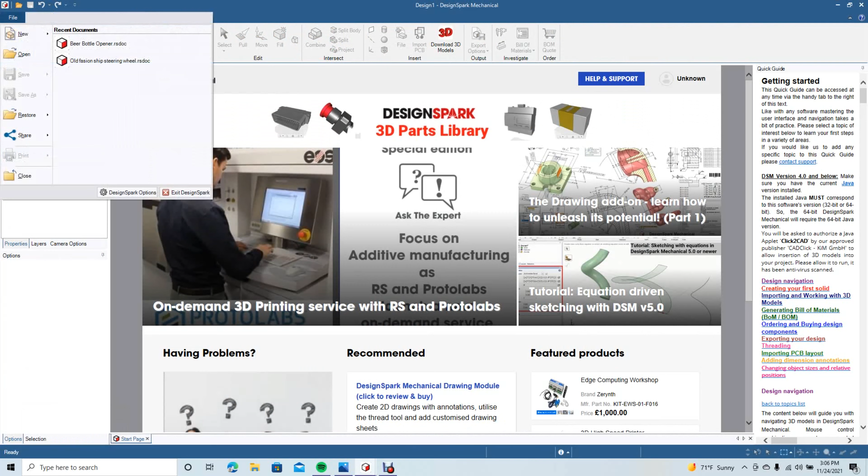So we're going to go ahead and go File, New Design, change the view to Plan, we'll minimize. I'm going to grab this JPEG that I got off the internet, use this as a reference, and we'll put it there in the center. Then we'll go ahead and blow it up. Then we want to get our square tool.

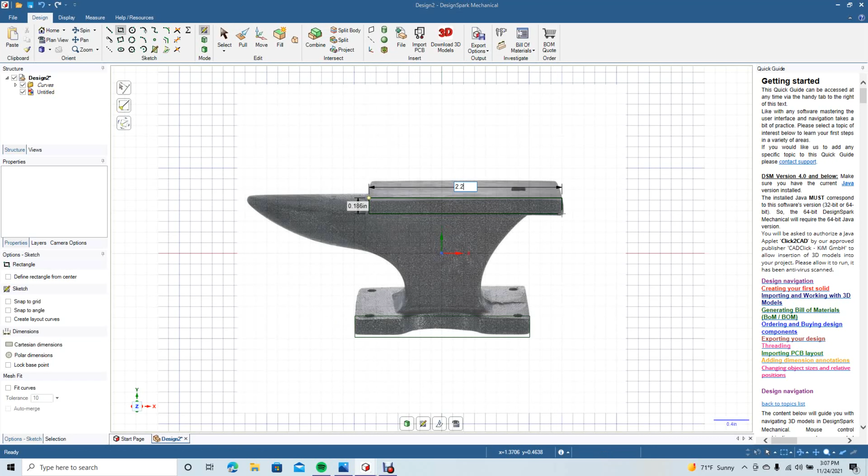So first we're going to draw this shape here. So that's going to be 2 by 0.25, and these dimensions aren't anything specific, they're just as close as they can get. So then this one here is going to be 2.2 by, hit the tab key, by 0.25. Okay, so go ahead and get rid of that.

So now we're going to go ahead and draw the shape in here. So we'll go ahead and use the line tool, go from there straight down and end it wherever. It's not going to matter too much because we're going to be using the spline tool to fill in the rest. So go ahead and get the spline tool.

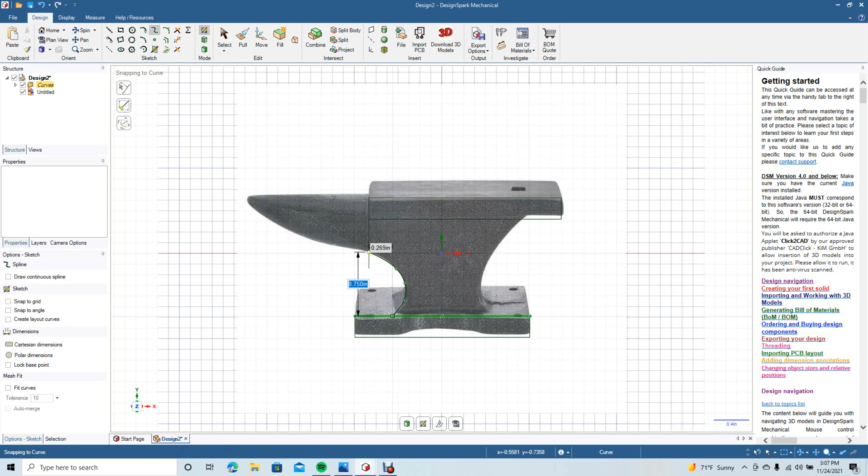We're going to go from there, drag out, curve, drag out, curve, drag out, curve, and then go ahead and select to end it. Go back to the spline tool, go from here, click, drag out, curve, drag out, curve, drag out, curve, and end it. We'll go here to select tool.

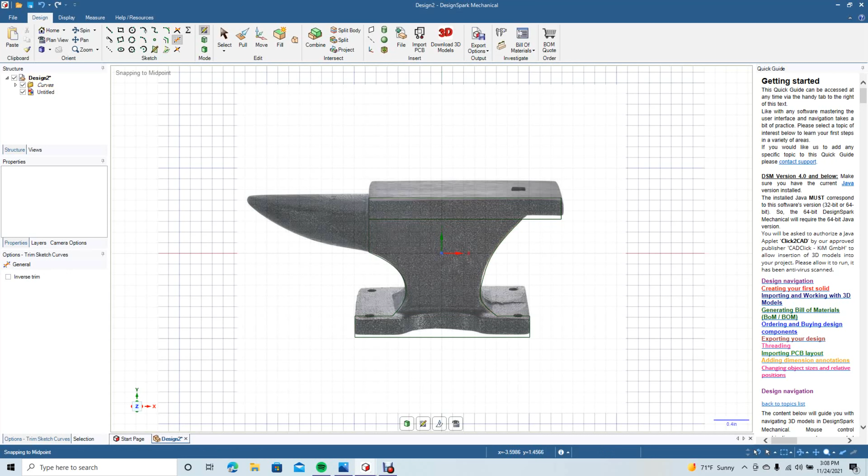Now we're going to go trim away these little pieces here, we don't need them. Alright, that's going to be it for that. Hit the select button, we'll go ahead and spin. Alright, we're going to go ahead and do the pull.

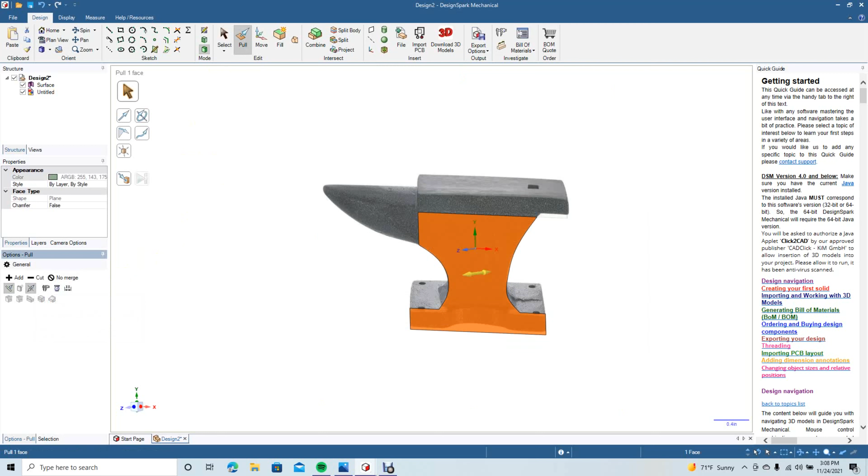Select the bottom part, go ahead and pull. We're going to pull from both sides, and we're just going to pull out with this, and we're going to go to one inch. Okay, we'll end that, and we're going to grab this.

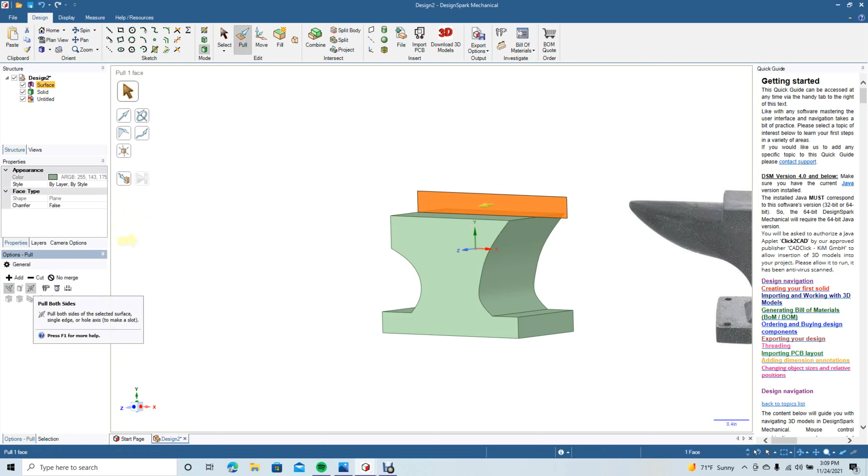Let's move that out of the way for a second. Going to get this one. We're going to go to pull. We're going to change this to both sides. This one we're going to make a little bit bigger because it's going to be like an overlapping shelf. So we'll go 1.4. Select.

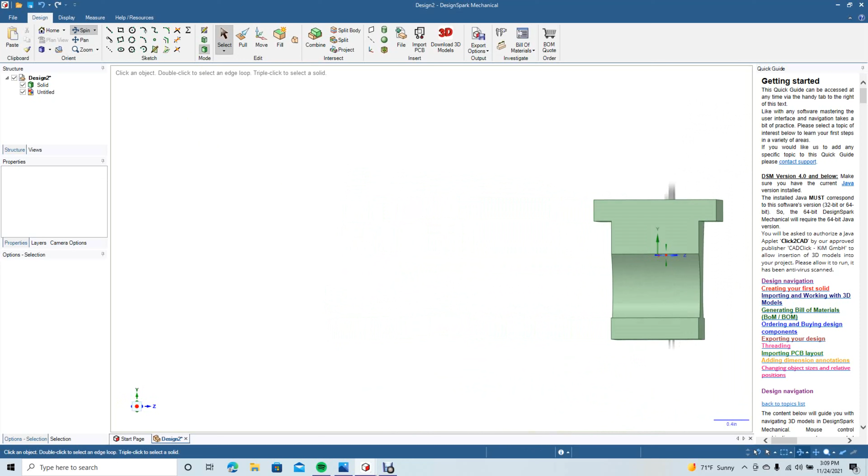We'll go ahead and spin that, see how it looks. Okay, it's a little overlapping. That's fine. Okay, now we're going to go ahead and spin this around to this side, and then we're going to go ahead and create our shape to use the loft with. So go ahead and click on that.

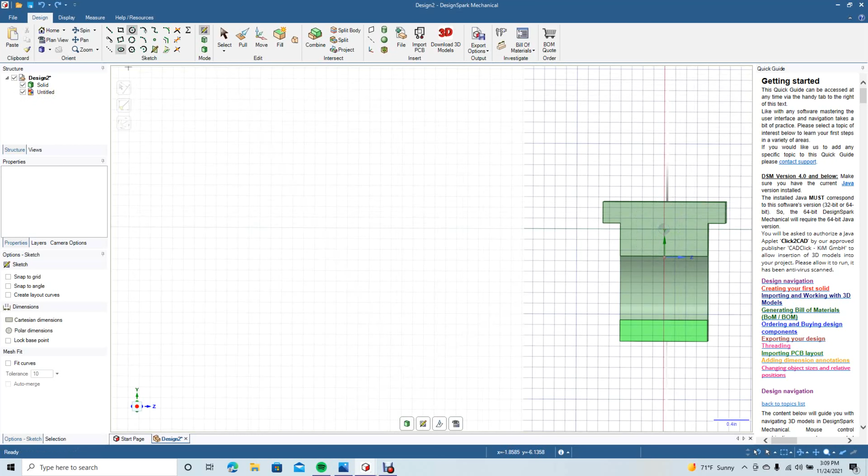Go ahead and get the circle. Go ahead and click in the middle there. Actually, I'm going to undo that. I need more of an oval, so we're going to use the oval tool, the ellipse tool. Click in the center. Pull out this way, almost the full length of the anvil. Click, drag up to the top,

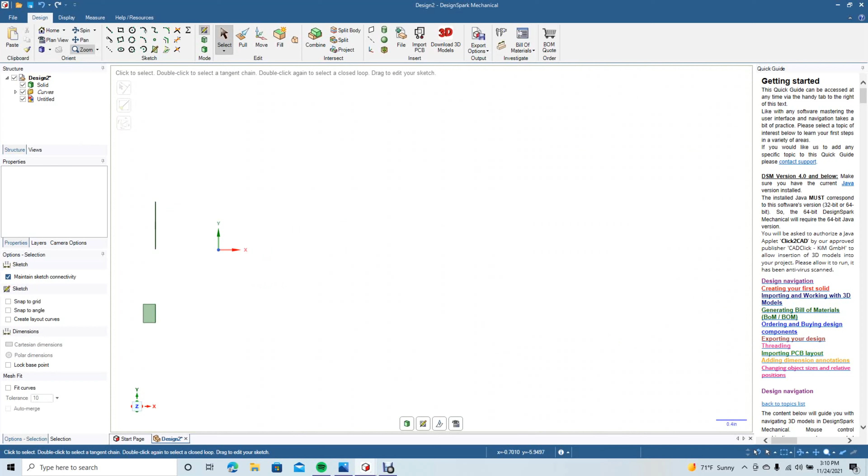click, select, go back to your view, go to top view, go back to mode, 3D mode, and we're going to spin this a little bit, and then we're going to pan over, use the pan tool. Okay, now we're going to copy this shape here. So click on it. Once it turns orange, Control C on the keyboard, Control V on the keyboard.

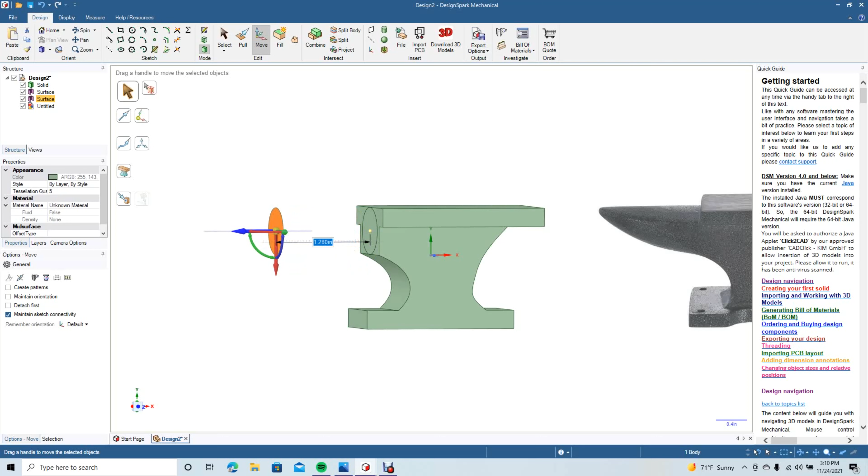Go ahead and go to your move. Click the blue arrow. Pull this out as far as you want your horn to be. So we'll go 1.28. All right, so then we're going to click here on the select tool. We're going to spin. Now we need to make this a little bit smaller, so we're going to make another one. Going to go grab your circle tool.

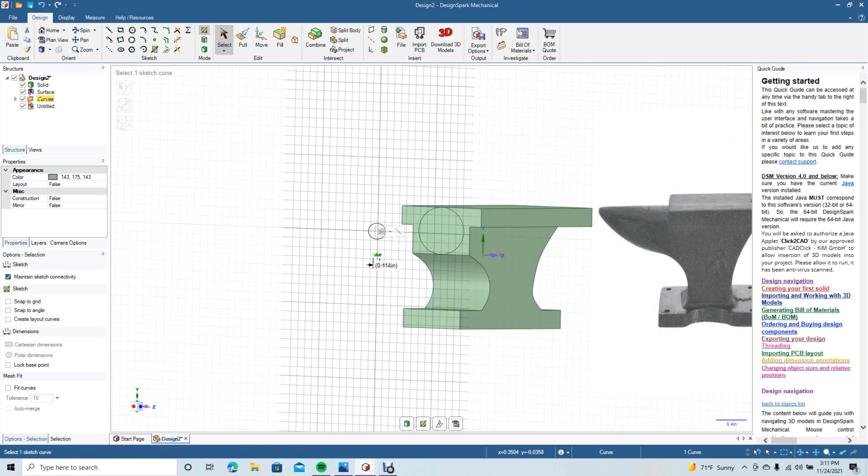Actually, let's do the same thing and go with an oval. So we're going to go from the center there, out and then kind of come down a little bit so it's like an oval, and then click. Hit the select button. We're going to get rid of that circle. We don't need it anymore. Hit delete. Get rid of that line. We don't need that. Okay, now we're going to go ahead and spin.

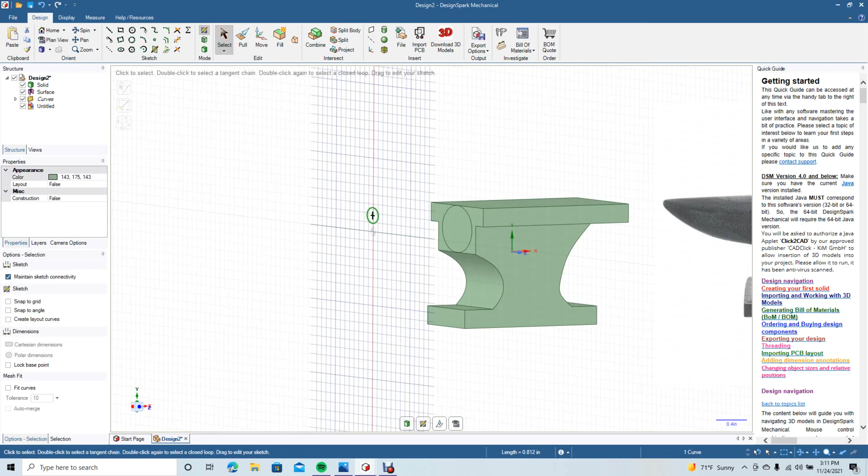So now we're going to go ahead and move this up because it's not going to be a perpendicular horn if we leave it there. So we're going to go ahead and go move. We're going to drag a marquee around that. We're going to use the red arrow and we're going to move it up. Then we're going to go with our select button, hit the spin tool, spin that around.

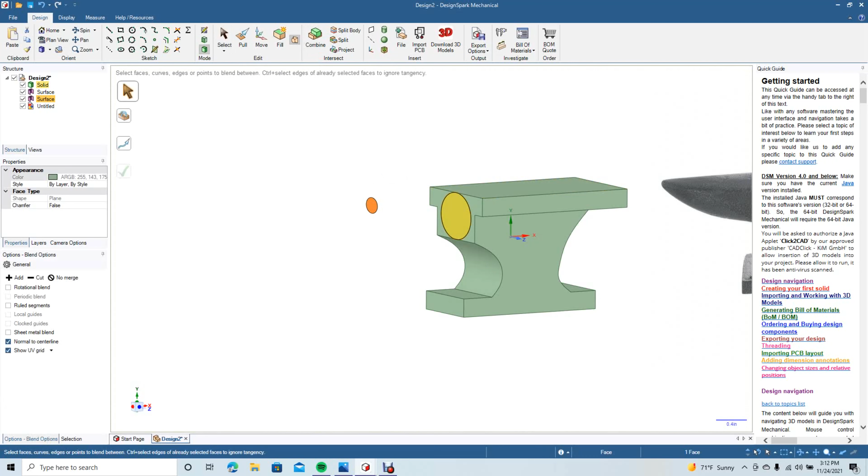That looks pretty level. So now we're going to come over here and use this tool called blend. So we want to click on the blend tool. Actually go back to your mode. Click there, blend, hold down the control and click there. And now once you like it, go ahead and hit the green button, the check button. Now we'll go ahead and spin this.

That's a pretty decent horn. I'm happy with that. Now we're going to do a few more things to the anvil to sharpen it up a bit. We're going to get the pull command and select all these outside lines.

Now we're going to change that from rounded corners to chamfer. We'll click and drag. Not going to put a big chamfer on there, maybe 0.5. Get the select button.

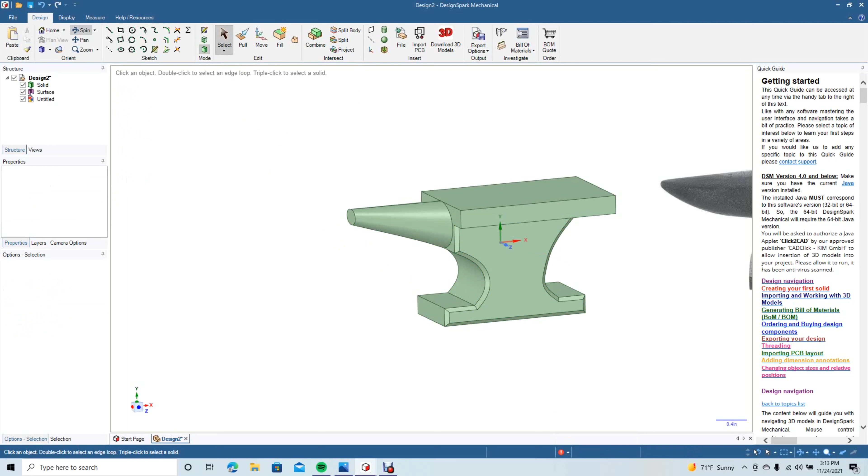We're going to spin this around to the back side, do the pan over, and go to pull. We're going to select outside lines just like the other side.

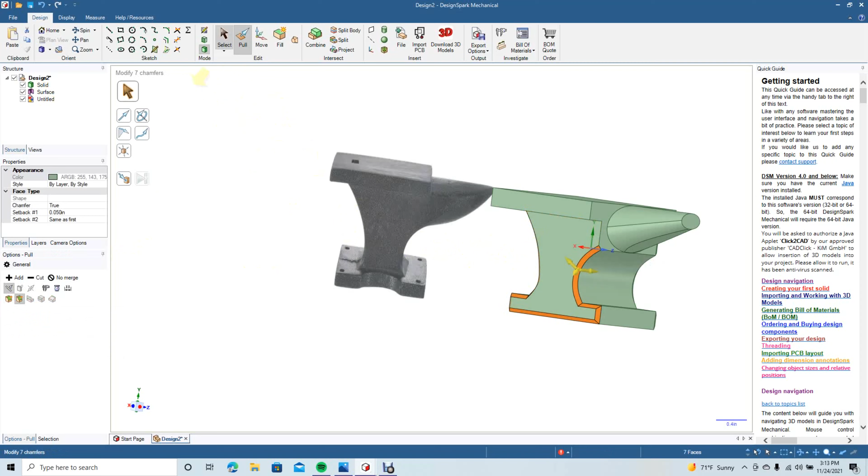We're going to pull and change that to chamfer, click and drag to 0.05, then hit the select button and get our spin tool.

It's not too bad. Then we're going to do the pull, change those right there. Chamfer, 0.05. And then go back to top view.

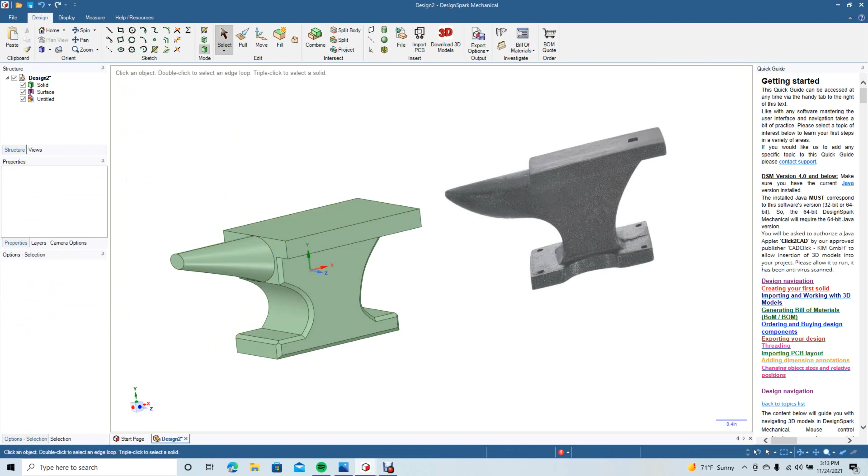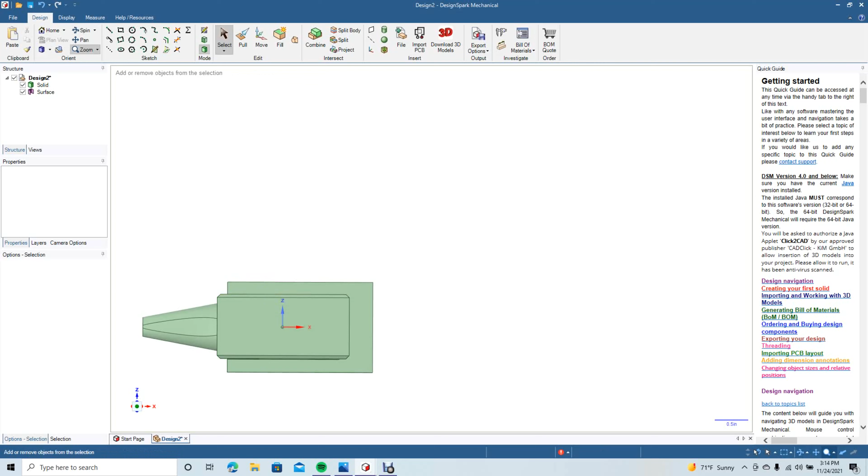It doesn't look too bad. Now we can get rid of this, we don't need it. We're just going to add the 4 holes and then the square at the top. We'll spin this around to there, bottom, hit Control plus to zoom in, and pan to move over.

We're going to do our offset curve. Click on the line, we'll offset that over 0.15. We're going to offset this top line down 0.15, and then do that one up 0.15.

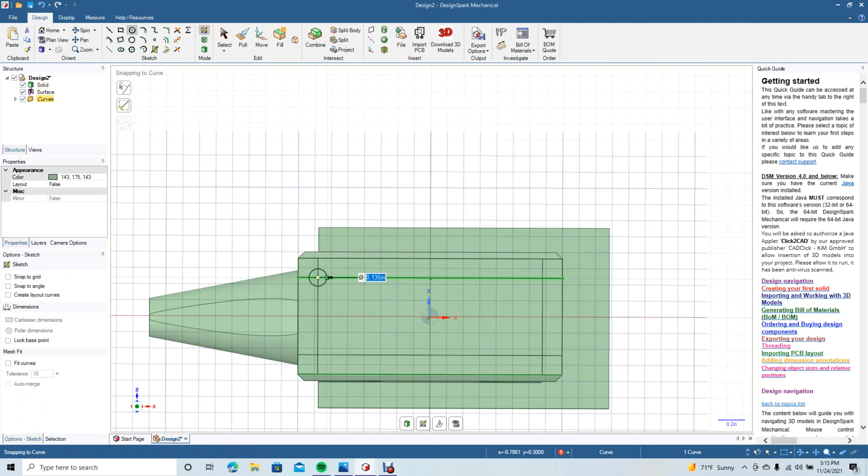Now we're going to hit the select. We're going to grab our circle and put some holes here, each at 0.125. Get the select.

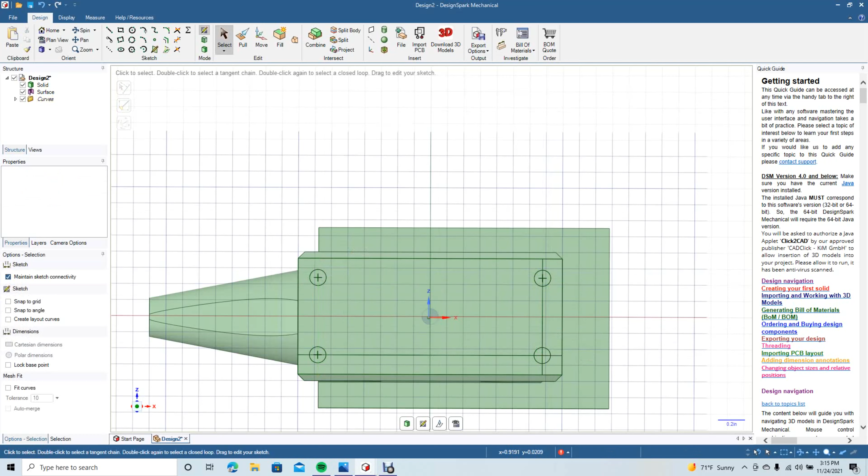Go ahead and get rid of these lines, we don't need those anymore. Now we're going to spin. We got to get rid of this bottom line, we don't need that one. Guess I forgot it. Now we're going to pull.

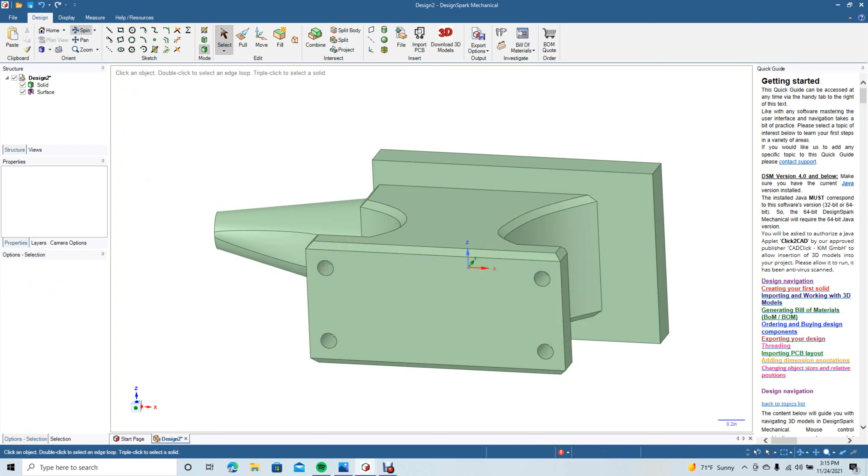We're going to select all of these by holding down the control key, and then pull through to the other side. Click on select, and spin that.

Holes come all the way through. It's a pretty decent little anvil. We're going to pull and add a radius right here, 0.1.

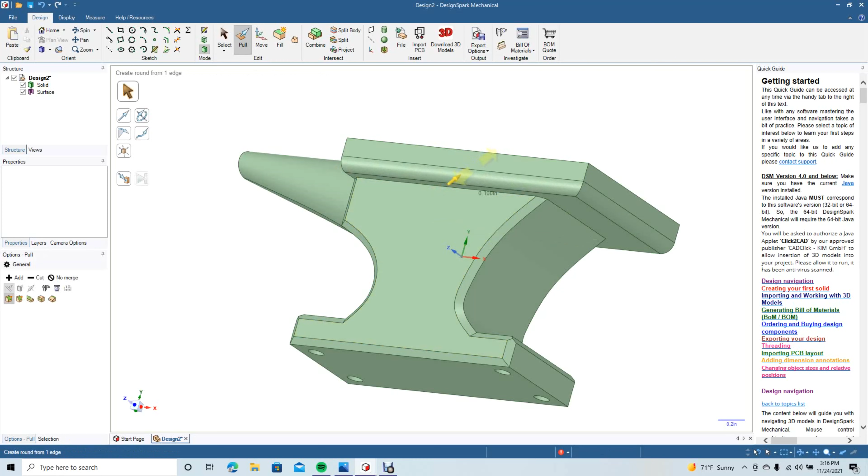Maybe the radius is on the bottom, 0.1. Now we'll go ahead and spin, spin this around, and go ahead and pull.

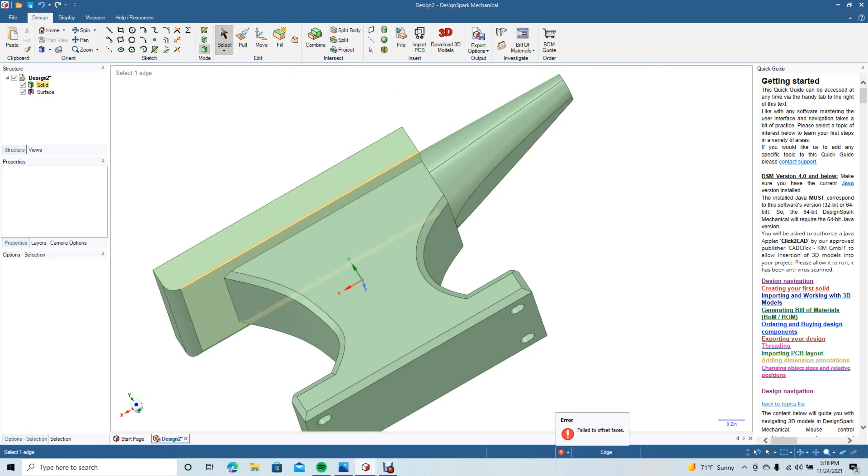For some reason it's not letting me put a radius in there. Go ahead and click there, click pull. There it goes, I was on the wrong element. 0.10. Go ahead and get the spin. Looks pretty decent.

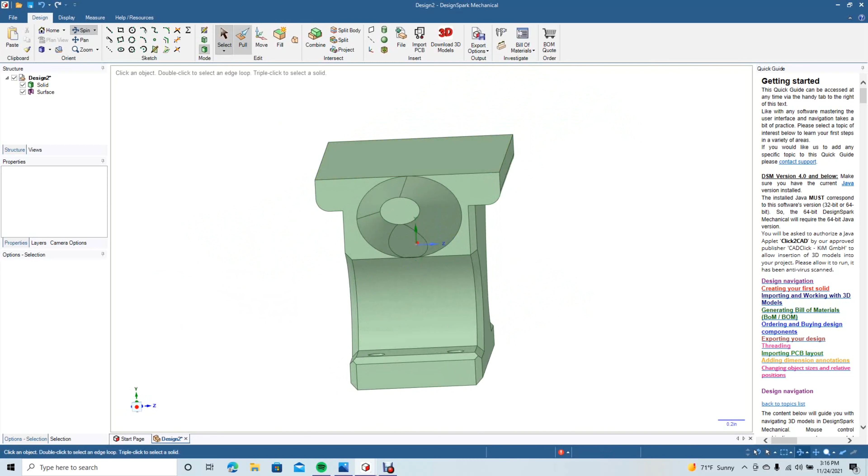What we could do here for the nose is add a plane there. Click on the plane, get your oval tool, and highlight the plane.

Okay, put another plane in there. Oh, it looks like I didn't do that right. All right, we'll go ahead and do it again, getting that one with the plane highlighted.

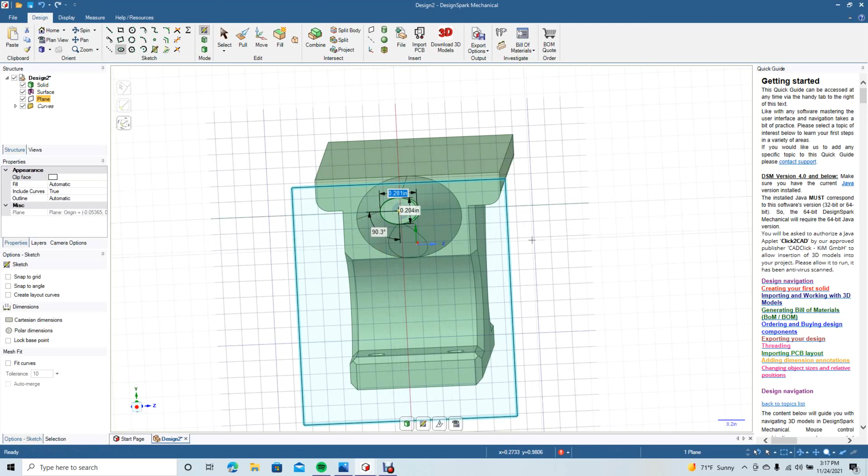I'm not sure why this is not on there completely straight. Let's zoom in. Go ahead and get the oval tool one more time. Okay, that's better, go up to there, click.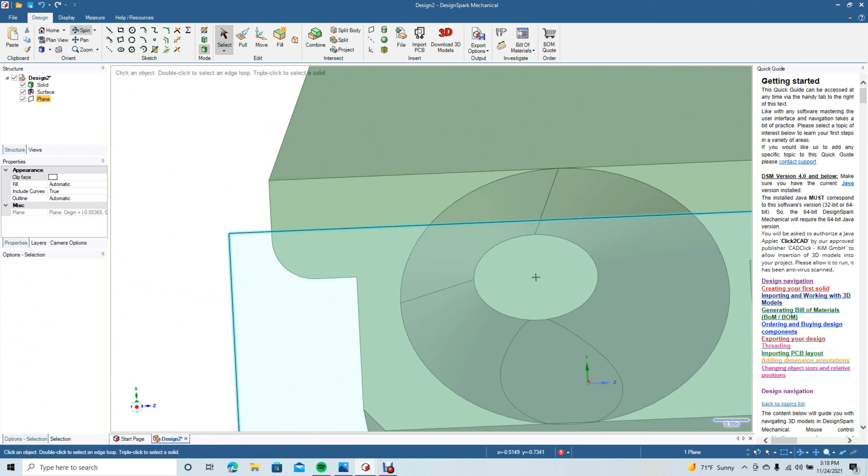Go back to the model. Let's spin this. Let's go to pull, and pull that out a little bit. Go ahead and hit select.

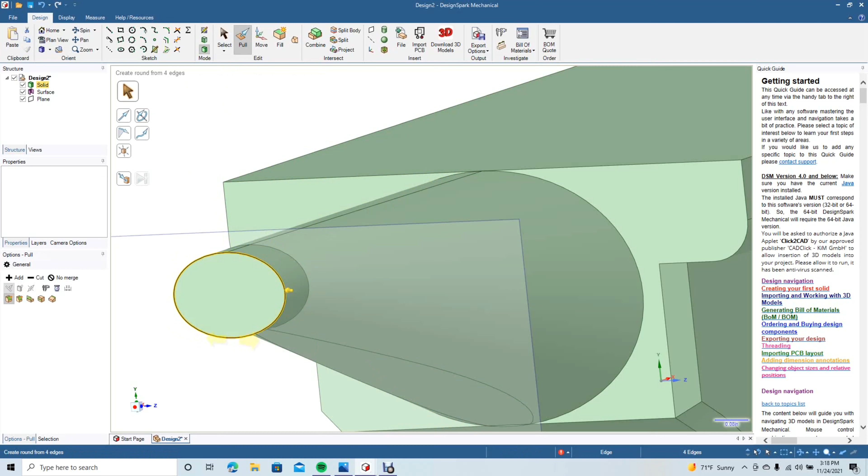I'm just pulling this out a little bit so I can put a radius corner on it. Go ahead and click there, bottom, that last little piece. Click and drag, and we'll put a rounded corner on it of 0.4.

I'll get rid of this plane, we don't need it. Go ahead and go to the top view. There we go, there's our little anvil.

This might be interesting for somebody that is into blacksmithing and might want to have one sitting on their desk. This shape right here is called the horn. You can experiment and probably get it to look closer to the one on the drawing.

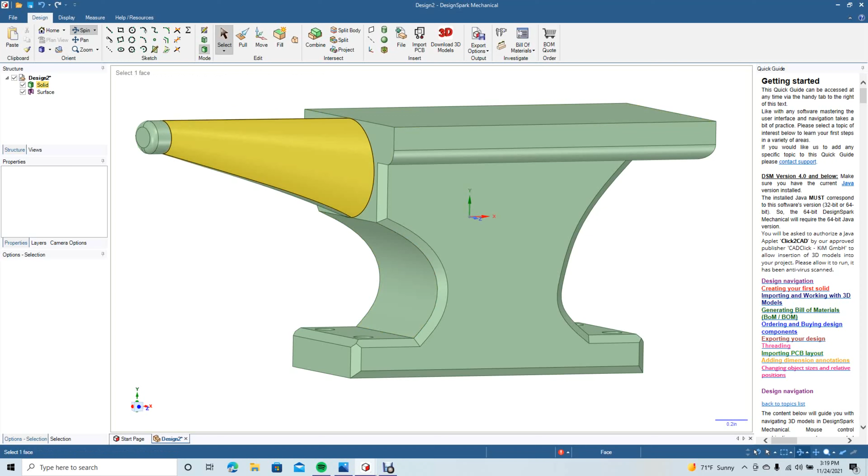You just have to add more, copy and paste more of these, and go from an oval at the beginning, the middle would have to have an oval, the end would have to have an oval, and then another oval here, and then you'd have pretty close to a perfect horn.